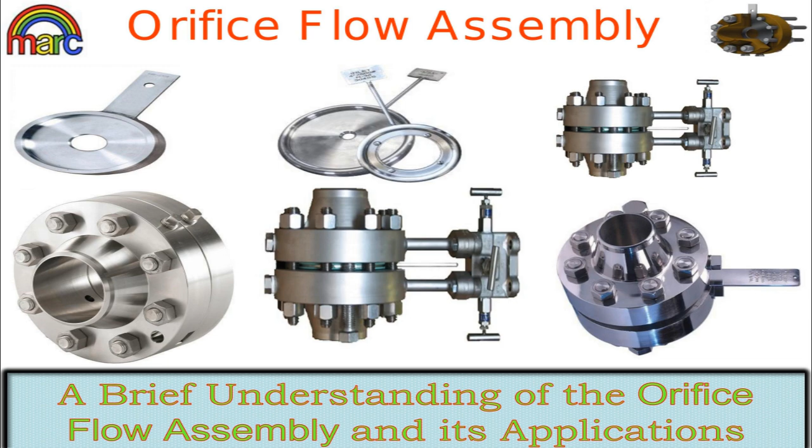So I am going to begin this presentation slide after slide, and I will be explaining you. Now let's begin with the definition of the orifice. Orifices are the most basic of the devices for measurement and control.

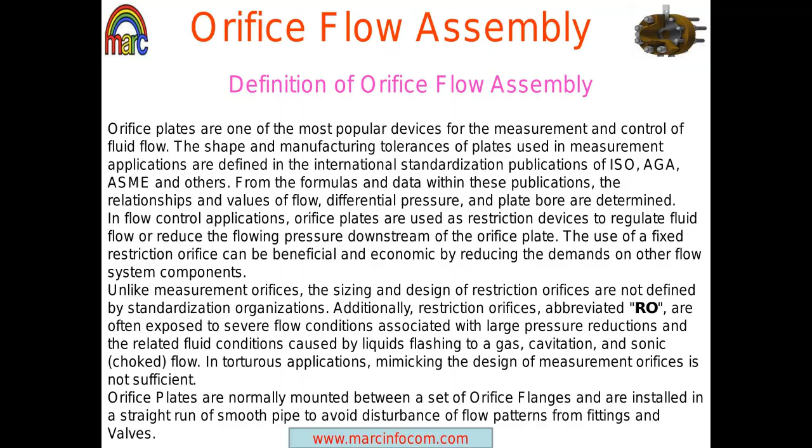The shape and manufacturing tolerances of plates used in measurement applications are defined in international standardization publications such as the ISO standard, the AGA standard, as well as the ASME standards and others. From the formulas and data within these publications, the relationship and values of flow, differential pressure and plate bore are determined.

In flow control applications, orifices are used as restrictive devices to regulate flow or reduce the flowing pressure downstream of the orifice plate. The use of a fixed restriction orifice can be beneficial and economic by reducing the demands on other flow system components. So you see, orifice is one of the cheapest means of measuring flow.

Unlike measurement orifices, the sizing and design of restriction orifices are not defined by standardization organizations. Additionally, restriction orifices, abbreviated as RO, are often exposed to severe flow conditions associated with large pressure reductions and related fluid conditions caused by liquids flashing to a gas, cavitation, and sonic or choked flow.

In tortuous applications, mimicking the design of measurement orifices is not sufficient. The orifice plates are normally mounted between a set of orifice flanges and are installed in a straight run of smooth pipe to avoid disturbance of flow patterns from fittings and valves.

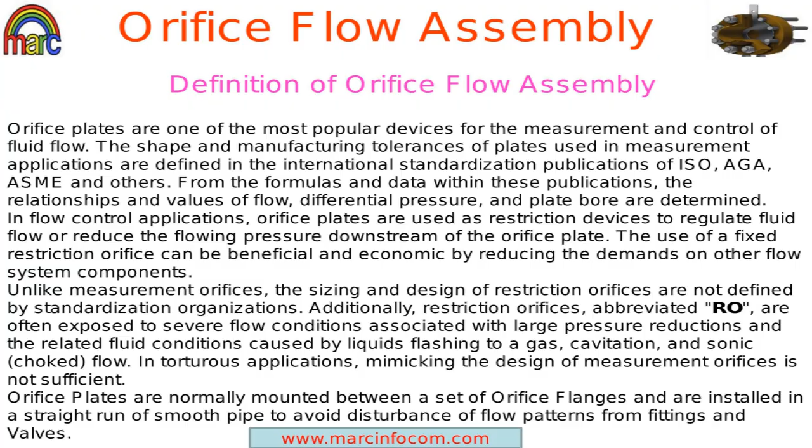The second part you see is the bore, or the orifice bore, which is basically a hole in the plate calculated as per calculations. The third is the tappings, from which we get the flow or differential pressure. Tappings can be either flange tappings or D/2 tapping.

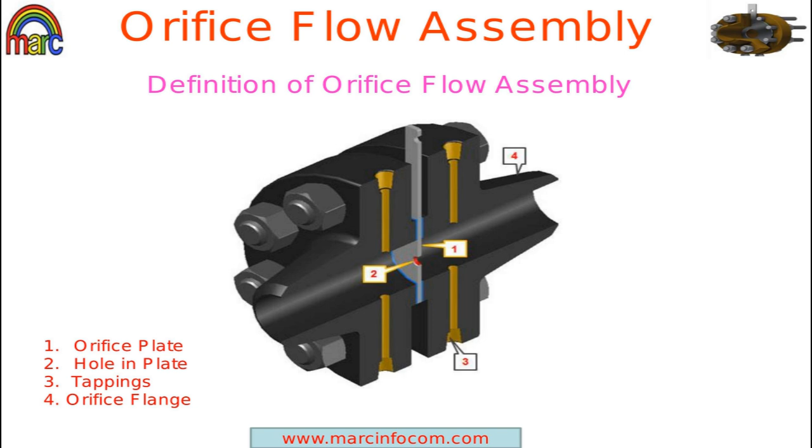The fourth part is the orifice flange. The orifice flange can either be a weld neck flange or an SORF flange, and the flange material also changes. For acidic applications it is stainless steel, for other applications it is carbon steel. So mostly carbon steel is used for general applications. So you see, this is the basic diagram of the orifice.

Our presentation will now be on segmental bore. Segmentally bored orifice plates are provided for measurement where solids are entrained in a gas or liquid flow stream. The circular portion of the bore is inscribed within a circle, normally 98% of the pipe diameter. The segmental opening may be placed either at the top or the bottom of the pipe.

Industries using these are mostly sewage treatment, steel, chemical, water conditioning, paper and petrochemical. Segmental bore orifice plates are used for around 8 to 9% of all orifice plate applications.

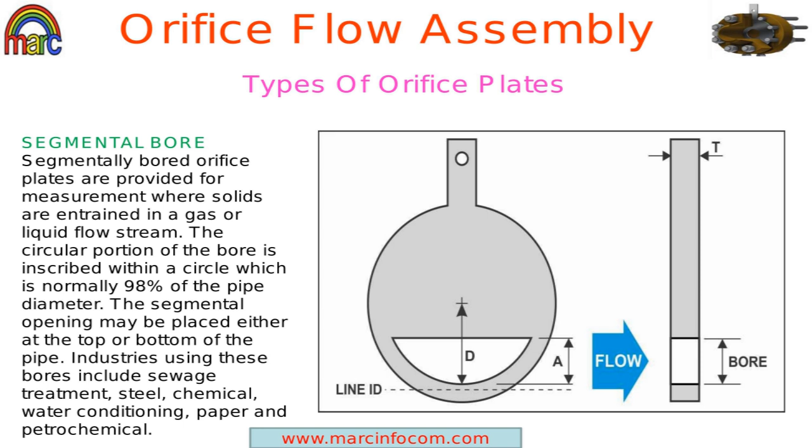In this, the bore and the bevel is the standard method of limiting the plate edge thickness. Unless otherwise specified, the plates will be beveled to the current accepted standards. So there is a 45 degree cut which we have to make on the side of the edge, after the bore area, in the direction of the flow.

This is one of the most common types of orifice plates which we use, mostly for water applications and normal applications. The metals that we use in this case are nickel, monel or stainless steel. This orifice has the highest accuracy among all orifice plates. They are mostly used for clean fluids, clean gases and steam flow. So now we will go to our next presentation.

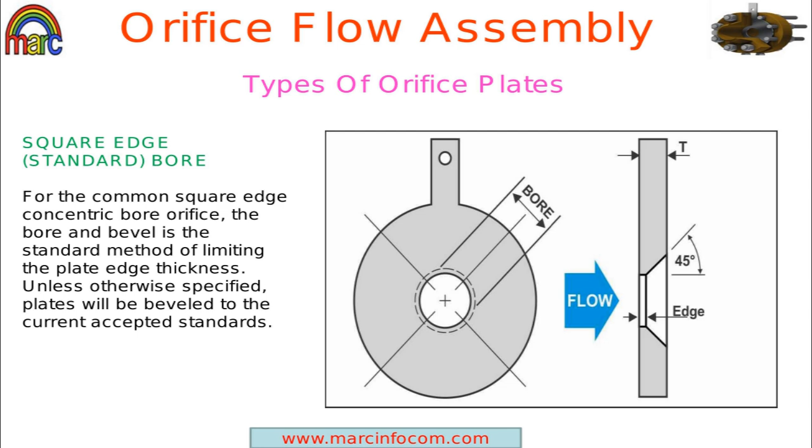RTJ type orifice plates are used for some special applications. The RTJ type orifice plate incorporates an internal gasket, either an oval or octagonal ring, for mounting between ring type joint flanges. It is based on proven technology, has no moving parts, and is suitable for high temperature and pressure applications.

Orifice plates are recommended for clean fluids, gases and low velocity steam flows. Plate thickness depends on line size and differential pressure and should be sufficient to prevent the plate from bending under operating conditions. Orifice plates can be made in accordance with customer drawings as required.

RTJ type orifice plates can be supplied complete with ANSI B16.36 orifice flanges. They are mostly used for steam applications where there are chances steam loss may occur or steam may escape. These are the applications where RTJ type orifice plates are mostly used.

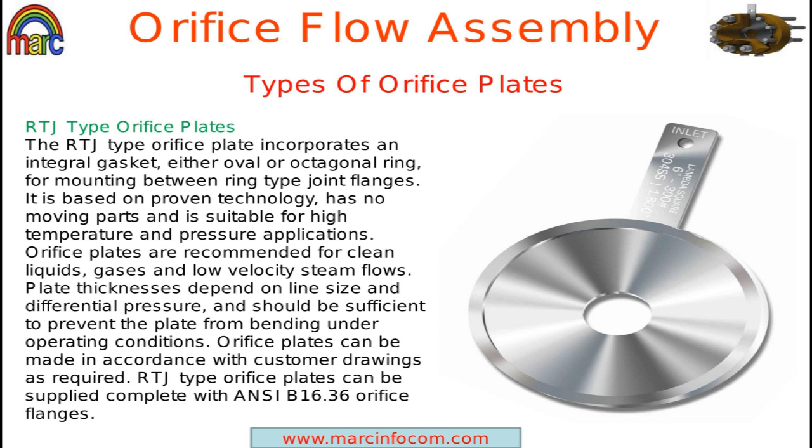Now the other type of orifice assembly we are discussing is the multi-tube type orifice assembly. Meter tube is a complete set consisting of a multi-hole orifice plate and straight lengths of piping on its inlet and outlet. Design of the meter tube is divided into three parts: inlet, where the fluid flow is straightened; measuring part, the orifice plate; and outlet.

Straight lengths of piping in the meter tube comply with all conditions of dimensional and geometric accuracy as defined by ISO 5167 standard, related to the pipe sections adjoining the orifice plate. This layout guarantees entrance of stabilized flow into the primary element and accurate measurement of flow rate. The concept of meter tube also minimizes non-conformities during assembly of orifice plates and their subsequent operation.

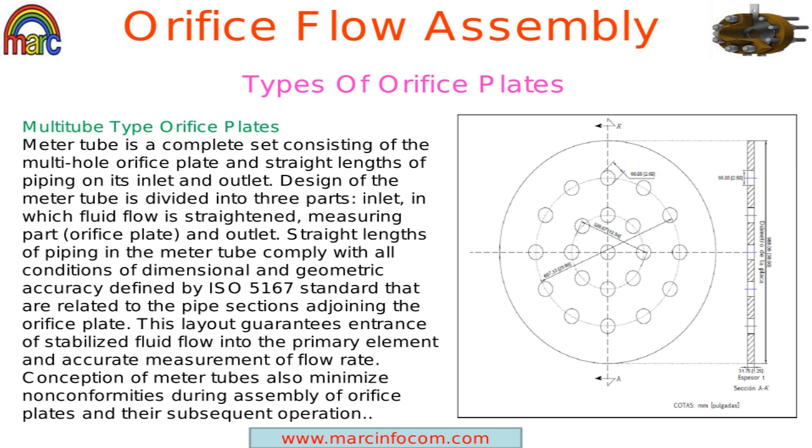So another type of orifice is multi-tube orifice plates, and they have special applications. In continuation with the different types of orifice plates, today we are discussing eccentric bore orifice plate.

Eccentric bore orifice plates are plates with an orifice off the center, below the center, or eccentric, as opposed to concentric where the hole is in the center. In eccentric, it is not in the center but a little bit below. The bore of the eccentric orifice normally is inscribed in a circle which is 98% of the pipe diameter, so that solids or slurries may pass through.

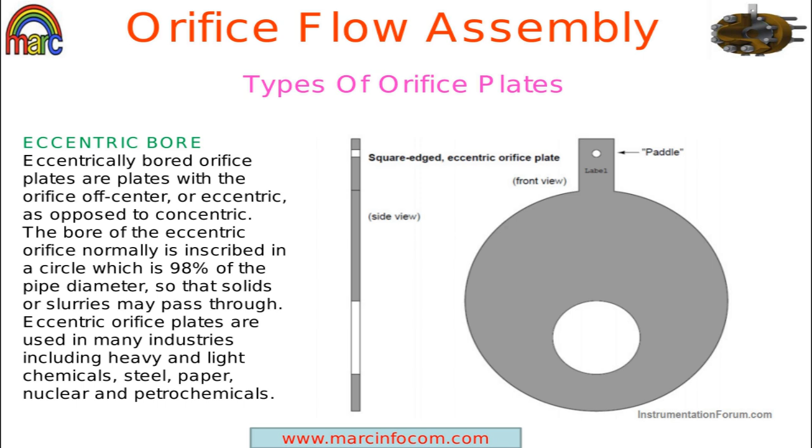Solids and slurries are quite thick, so if you have a hole in the center, it will cause clogging. Therefore, this eccentric bore orifice is used. Eccentric orifice plates are used in many industries like heavy and light chemicals, steel, paper, nuclear and petrochemicals. These are the areas where eccentric bore orifice plate is used, for thick and viscous liquids.

Now I am discussing the orifice type called the quadrant edge bore. This is a special type of orifice we are using. The quadrant edge bore is an orifice with an inlet edge rounded. Instead of beveling, the plate is counterbored to the desired edge thickness.

The radius of the quarter circle bore is a function of the orifice to pipe ratio, which we call d by D ratio. Thickness at the throat is equal to the radius. This bore is specially designed for viscous fluids such as heavy crudes, syrups, slurries with a Reynolds number below 1 lakh. So the major use of quadrant edge bore is basically for viscous liquids.

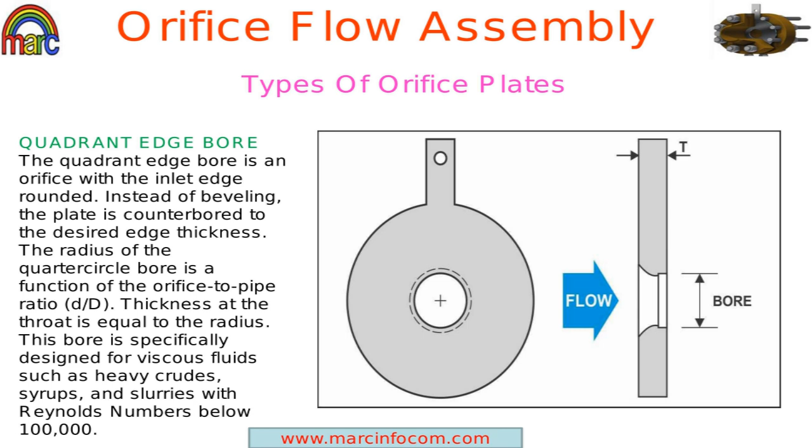Multi-hole orifice plate can be incorporated in both vertical and horizontal piping. So whether you have horizontal or vertical pipeline, both ways you can use multi-tube type orifice plates, and they do not require a very great length, because instead of one hole there are many holes, which basically helps a lot. So this is the whole idea of having multi-tube type orifice plates.

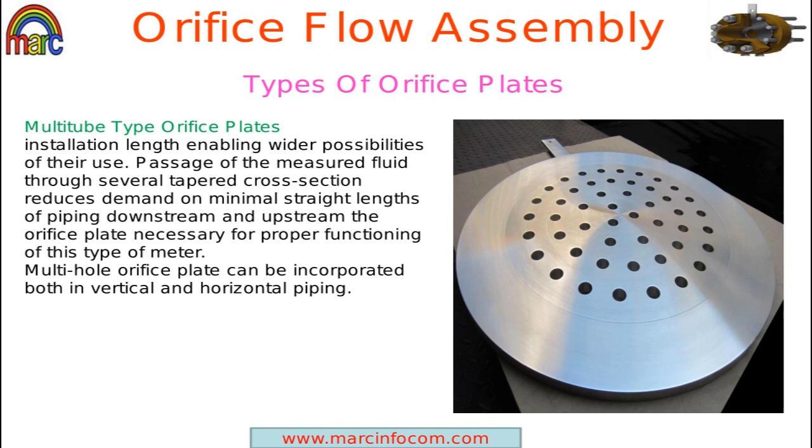In the last slide we spoke of multi-tube type orifice plates, and we continue that same presentation here. The division of the meter tubes into individual sections also enables easier maintenance, inspections, or subsequent verification of the meter. There are corner differential tappings.

These are incorporated in the body of the flanges, between which the plate is placed, centered and sealed. The pressure tapping is led out of these flanges upon agreement with the customer's outlet of differential pressure, always customized to various options of primary element attachment to the metering circuit. Set of meter tube consists of stainless steel expander bolts that greatly facilitate dismantling and subsequent assembly of the disc.

Use of multi-hole orifice plate is limited by beta, which is equal to d by D. The orifice plate is made for beta equal to 0.4 up to 0.65. That is, for a beta ratio from 0.4 up to 0.65, we will be using multi-tube type orifice plates.

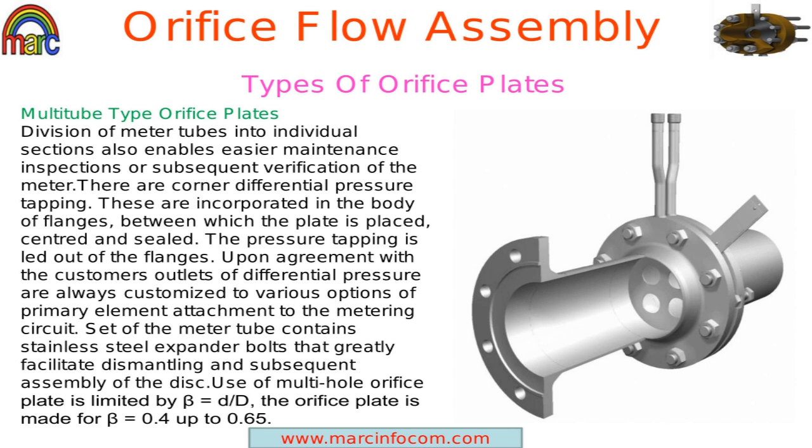In multi-tube orifice plates, the attachment section to the pipeline is finished with a preparation for welding. Meter tubes are mostly made of carbon steel, stainless steel, or refractory alloyed steel. The disc of the multi-hole orifice plate is made of stainless steel as standard. Upon agreement, the meter tube can also be made of plastic materials.

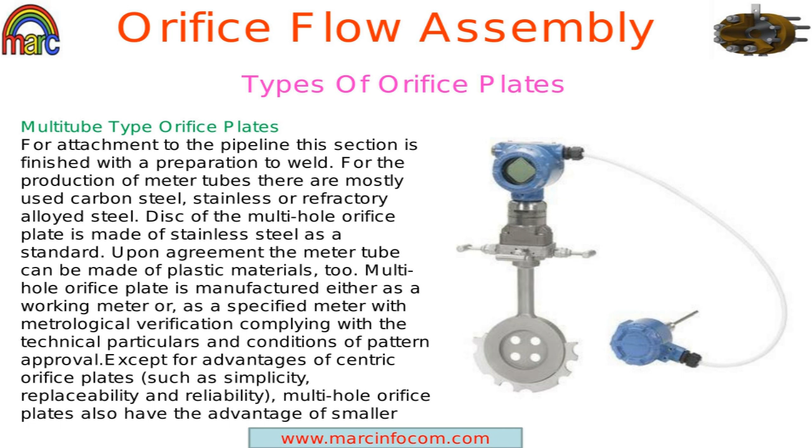The multi-hole orifice plate is manufactured either as a working meter or as a specified meter, with metrological verification complying with the technical particulars and conditions of the pattern approval. Besides the advantages of centric orifice plates such as simplicity, replaceability and reliability, multi-hole orifice plates also have the advantage of smaller installation length, enabling wider possibilities of use.

The other type of orifice plate is the multi-tube type, which has multiple tubes for flow measurement. The meter tube with multiple hole orifice plate is manufactured with nominal diameters from DN25, around 1 inch, up to DN1000.

The meter tube with multiple bore orifice plate is manufactured with straight line lengths of 2D upstream and 2D downstream of the orifice plate, where D is the diameter. The section 2D downstream of the orifice plate is finished with a weld.

Upon agreement with customers, it can also be supplied with a flange, a counter flange, and fasteners along with the flange and counter flange, plus the sealing. The meter tube can be equipped with a complementing entrance section upstream of the orifice plate to complete the length of 4D or 8D, depending on the length of the fittings upstream of the orifice plate.

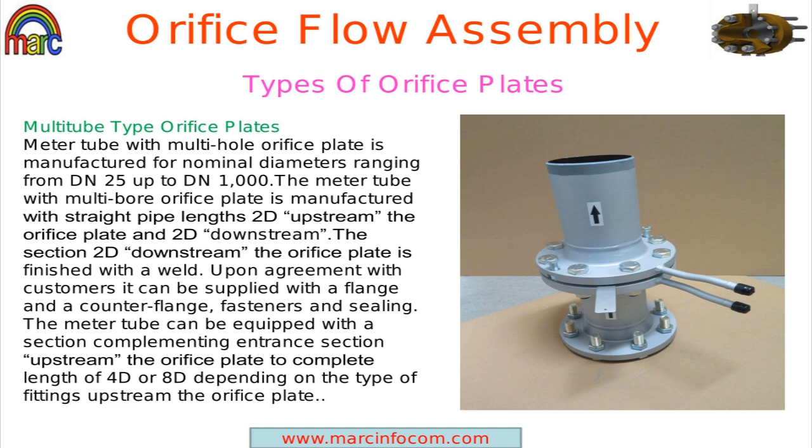So this is the basic type of multi-tube type orifice plates that we are using.

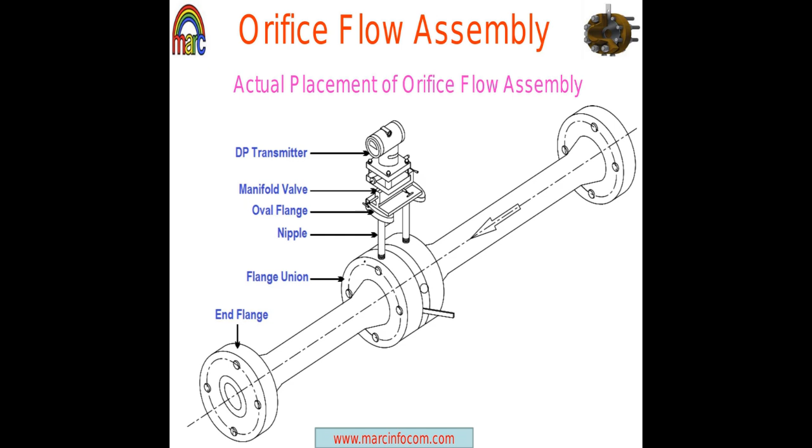Good morning gentlemen. In this slide I will show you the basic placement and working of an orifice flow assembly. In the diagram, follow the tick mark, which represents the process flow, that is, the direction of the flow.

The first thing you find is the DP transmitter, a differential pressure transmitter. This DP transmitter is mounted on a manifold valve, which is mostly made of SS316 or SS304 so that it doesn't get rusted in contact with water or any other liquid.

Then we have an oval flange, which may or may not be required; you can also use a straight round flange. The nipple is used to enable sending the liquid from the orifice assembly to the transmitter, and this nipple is mostly made of SS316.

Then we have the companion flange. In the companion flange, a hole is drilled inside through which the flow can be measured, that is, the incoming and outgoing flow on both sides of the orifice assembly.

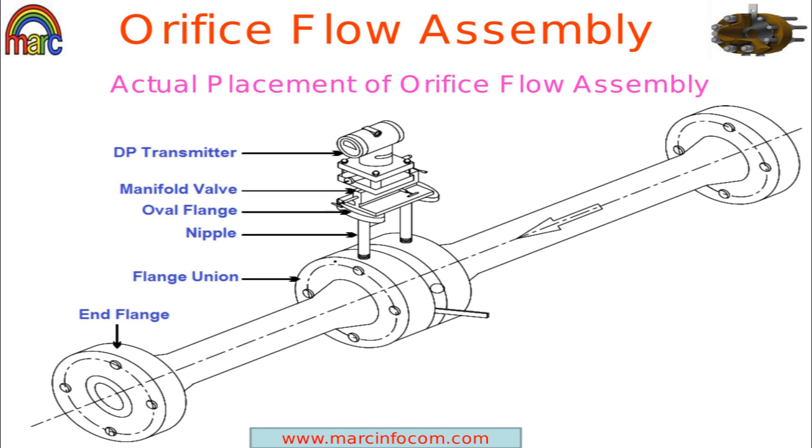Good morning, gentlemen. In this slide we will be discussing the applications of the orifice meter. In our previous slides we discussed what an orifice meter is and the different types available. Today our main concern is the various applications of an orifice meter.

The orifice meter is used to measure the flow rate of fluids in their single state, that is, gaseous state or liquid state. Any fluid which is either gas or liquid can have its flow measured using an orifice plate.

It can also be used to measure the flow rate of fluids in a mixed state. An excellent example is steam, which can be in either gaseous or liquid state; it is both, and if it cools down it can convert to liquid state. So wet steam or natural gas with water can also be measured.

Fluid flow rates in a pipe can be measured using an orifice plate. It is used in natural gas plants, water treatment plants, petrochemical plants and refineries, which have great usage of orifice plates and orifice assemblies, as well as in oil filtration plants. These are the basic uses and applications of the orifice meter, which is a very low cost device for measuring flow.

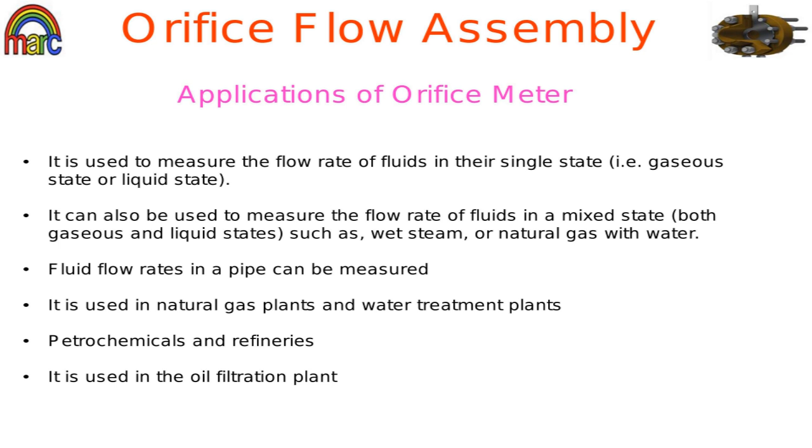Hello gentlemen, on this presentation I will show you a GA diagram, which is a general arrangement drawing of an orifice flow assembly. So let us start. The first part, if you see in an orifice flow, is the flow direction, denoted by a mark. The process pipe is there, and the flow is flowing from there.

Then we have the small d, which is the orifice bore diameter, the hole which we make inside the orifice assembly. Then we are using an SORF flange here, and inside that flange we have carrier rings. This orifice is basically an orifice with a carrier ring, and these carrier rings are either made of copper or stainless steel, sandwiched in between the SORF flange. So you can see here there are two flanges, two carrier rings, one orifice plate, an upstream flow tapping, and a downstream flow tapping.

In between these carrier rings we are using a gasket for pressing the whole thing, and the whole assembly is then within the flange. The orifice plate, if you see, has a 45-degree cut in the direction of the flow for measuring the orifice flow rate.

The design we are following is ISO 5167, and the other standard we are following is BS 1042. The orifice plate will be made of stainless steel, and the carrier ring will either have a steel gasket or a suitable gasket for that particular process.

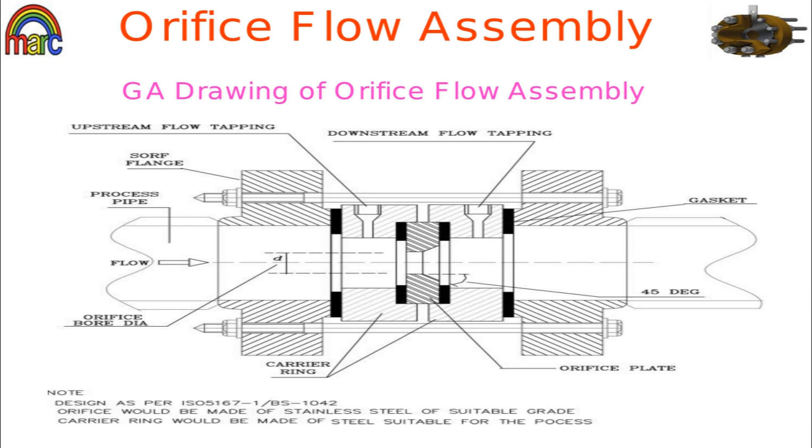Gentlemen, on this slide, as the topic shows, we'll be discussing the advantages of an orifice flow assembly. We were earlier discussing what is an orifice plate and how many types of orifice assemblies are there. So orifice flow assembly has many advantages, which we'll tabulate one by one.

The first advantage is it is cost effective and quite easy to use. Compared to Venturi or electromagnetic flow meters and other means of measurement, orifice is quite cheap. The second point is it occupies less space. Venturi takes a huge space, around 2 or 3 meters, but orifice doesn't take so much space.

You can put it as a platform, or as the orifice plate with a carrier ring and flange between them. Either way, it doesn't take more than a space of 300 or 400 mm — you only have to cut the pipe up to that length. If you compare that with a Venturi, you have to cut at least 3 meters of pipe.

Orifice has got another advantage: it can be used to determine flow rates in large pipes — above 500 mm, that is 1 meter, 2 meter, 3 meter, even DN 3000 pipes. Orifice can effectively be used to determine flow rates in such large pipes.

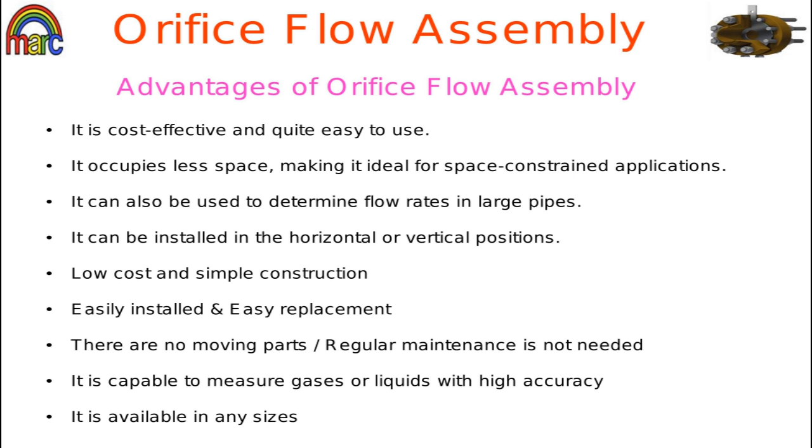This diagram you see is a flow diagram of the orifice flow assembly. This is an integral block, and on top of that you see the manifold and the DP transmitter. This is an integral orifice assembly where both parts of the integral block, along with the pipe and the companion flanges, are all welded together. So you just need to fix the transmitter on top of that.

This is a new type of orifice assembly. It is mostly used for smaller lines, from 50 mm up to a maximum of 100 mm.

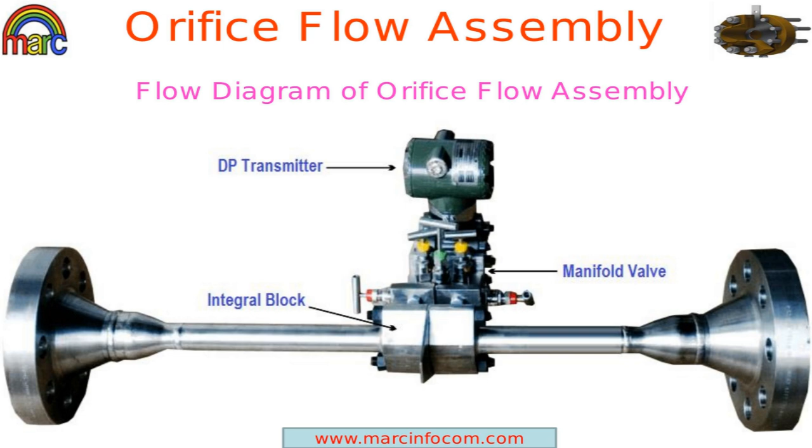Now let's discuss the disadvantages of orifice flow assembly that we mentioned in the previous slide. The accuracy of the orifice flow assembly will be affected by changes in temperature, viscosity, and density. So it is not a very good solution, because if there is a change in temperature, viscosity, or density, there will definitely be a change in accuracy levels.

The measuring range is limited by fluid viscosity; orifice doesn't work for very high viscous fluids. Another problem of orifice flow assembly is pressure loss and clogging. As the whole measurement takes place through an orifice or a hole, there are major chances of clogging.

Downstream pressure recovery is very poor in case of orifice flow assembly. The chances of the plate corroding are high if the fluid being measured has an alkaline base or is an acidic material. Over a longer time, the plate may corrode, and this can cause inaccuracy.

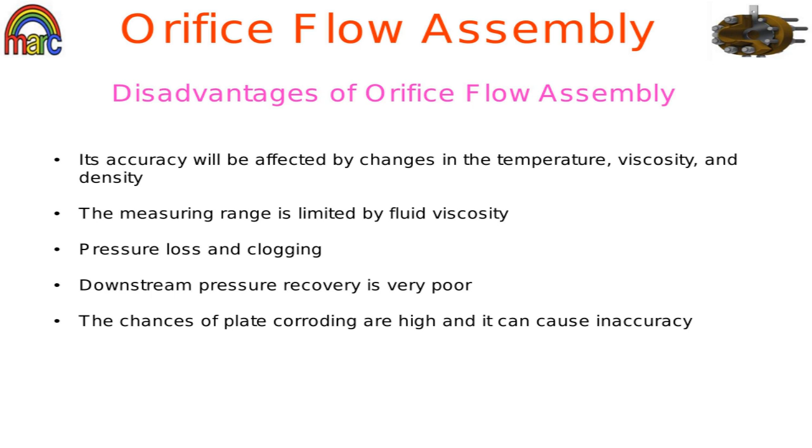On the earlier slide we discussed the advantages of orifice flow assembly. On this slide we discuss the disadvantages. Orifice assemblies have both advantages and disadvantages. The disadvantages of an orifice flow assembly are: it requires a homogeneous fluid, it requires a single phase fluid, and it requires the flow of axial velocity vectors.

Another problem which orifice has, because of this restriction in the pipeline, is that it causes a pressure drop in the fluid. So in areas where high pressure is required for the fluid to work in a turbine or other machines, orifice flow assembly is not recommended because there is a pressure drop, and as there is a huge restriction, there is a major pressure drop.

Its accuracy is affected by the density, pressure, and viscosity of the fluid, so for different fluids you can have different accuracy standards. The power consumption of this meter is high because of high frictional loss in case of orifice.

In case of dirty fluids, slurries, and wet steam, you can't use orifice because there is a restriction, so there will be clogging inside the pipeline. These are areas where clogging basically happens a lot, and it can be very dangerous to use orifice for these lines.